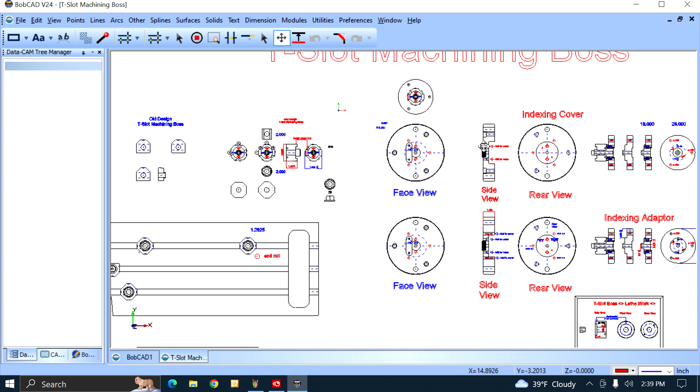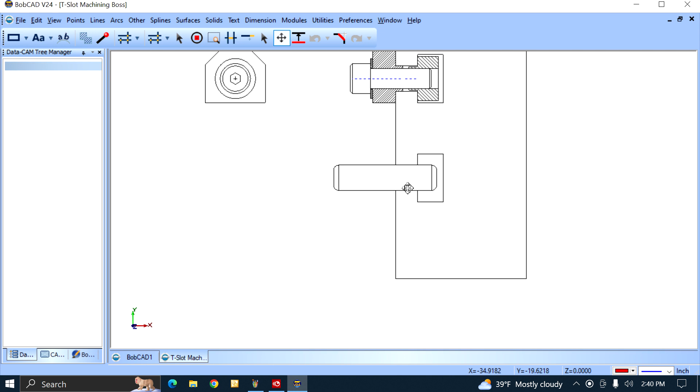All right, now you're in my CAD system. I call it my scribble sheet. I got a million ideas here. You understand? They're all over the place. No rhyme or reason. All right, let me give you an idea what T-slot machining boss is. Let's start here.

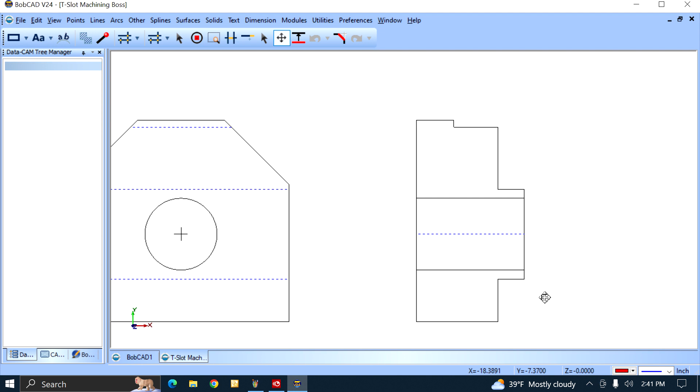Anyways, years ago, I did this, and I'm sure guys are still doing it today. When you wanted to put something parallel to the axis of the movement on a miller, you would put a dowel pin in the T-slot. You see the T-slot here, right? And it just hits tangent on the dowel pin, just about engages. Sometimes they fall over. The dowel pin idea is a piece of shit as far as I'm concerned, right?

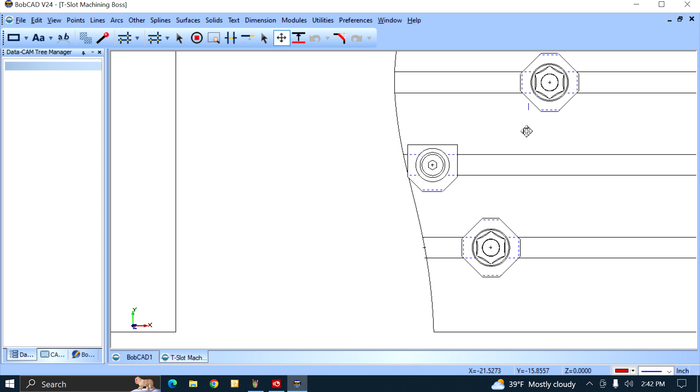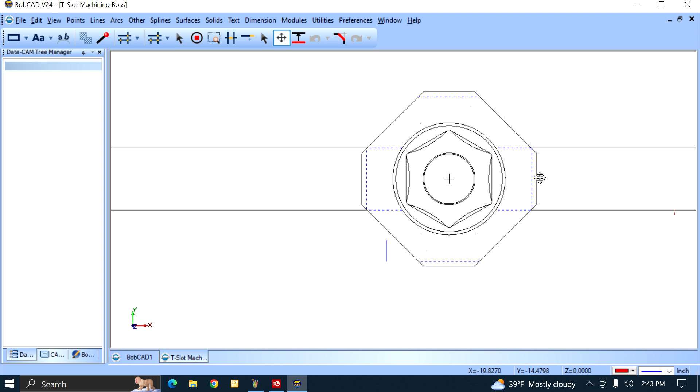What I did is, let me go over here and show you something. You see this thing? You see them invisible lines? You see that right there where the mouse is? That line and this line, that projects there. This line here is the milling machine table surface. This goes up against the surface. This little section goes into the T-slot, right? So that it's nice and rigid and it fits nicely, right?

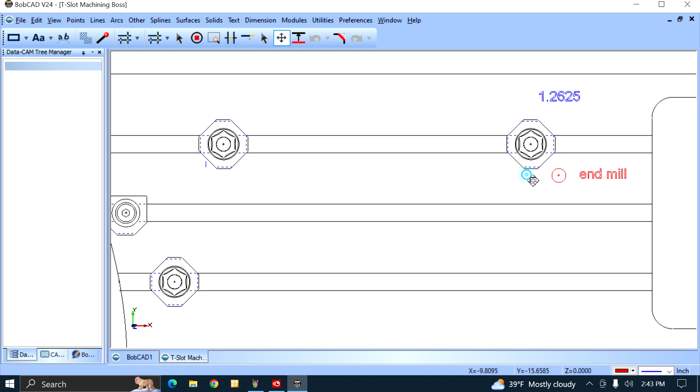This little line here is an undercut because you're going to use this surface. See this surface? You're going to bump something up against here, and you want some clearance underneath it. So here's the table, here's the clearance. You got any chips, they'll end up in that little area there. All right? Let me move on quickly.

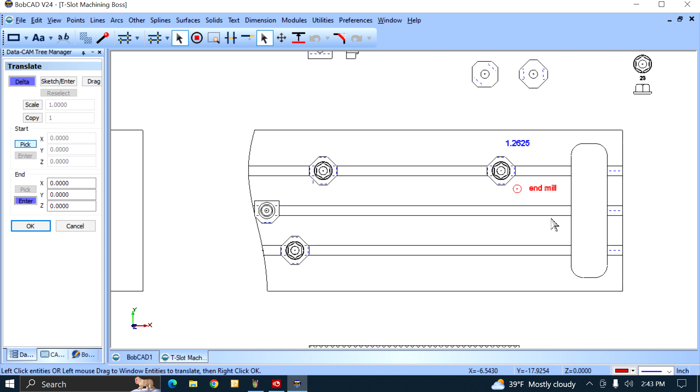Let me show you this. This here's a milling machine table. Looks like one, doesn't it? I'm showing the evolution here. This one, and this one is what I'm going to be making. This is old school. I've had this in my shop for 100 years. You see a washer here, socket head cap screw, and a hex for that cap screw. The invisible lines signify that this is put on a T-slot and it's fitted. So you just screw it down, right?

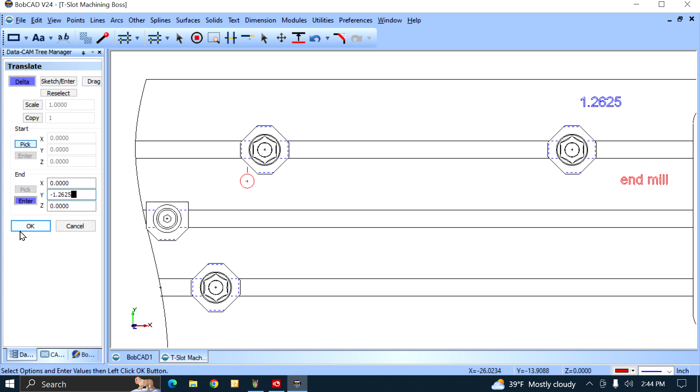Now, what good is that? Well, now that that's down, you can mill along this edge. You see along that edge? Now, if you had a couple of them, you get it dead straight. Let me emphasize it over here. This one here has 4 sides. 1, 2, 3, 4. So I got 4 places I can use for edges.

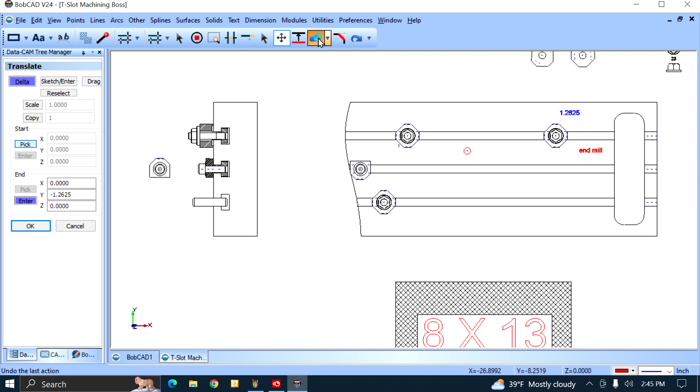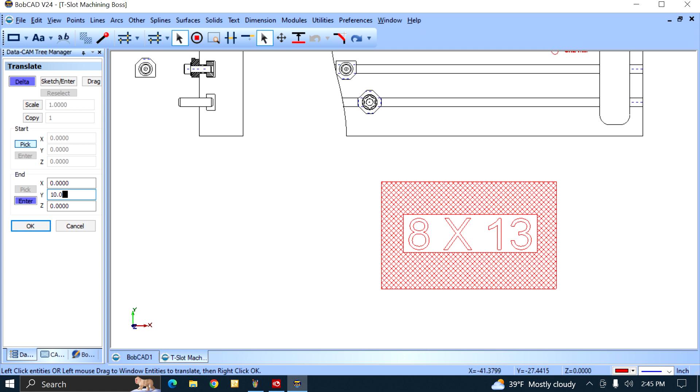Let's say I want to put something on the table, a sheet like this, 8 by 13. And I want to take it out and put it back multiple times. How do I do that? Where's my stop? You see this thing? That's a 1/2 inch end mill. I'm gonna mill along here, hit that boss. Just take a couple of thousandths. Come down here and take a couple of thousandths. Then that will be dead square, as square as the machine is.

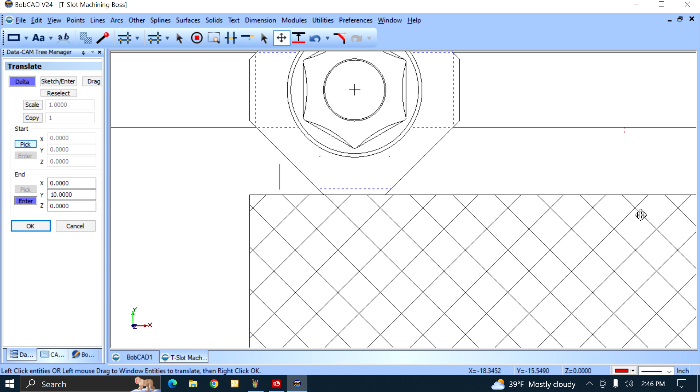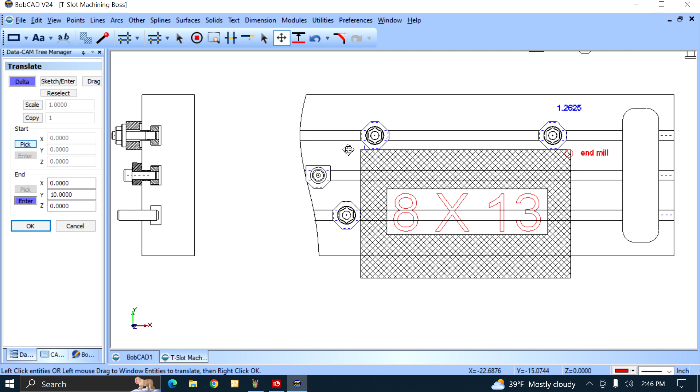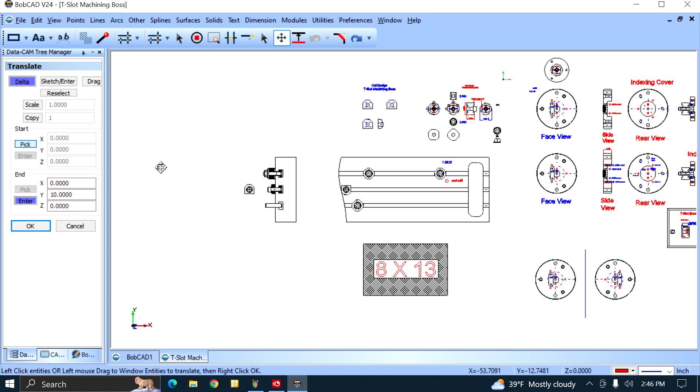Now I'm gonna move that in. Hang on. Now I'm going to move this end down this way to the left. See it? All in the same plane. Now I'm going to move this sucker down this way. Let me get it up so you can see it. You see, right along that edge? So you've cut it dead square, or as square as the machine is, which should be decent. Let me put this sucker back.

Now I'm showing that dotted line, that's clearance underneath, on all of these. I'm going to put this sheet, which is dead square here, up in there against that, okay? Okay, let her rip.

See how the edge of the sheet just hits in a narrow area, and there's clearance under it for any grit or chips. You can see it there, and you can see it here. See it right here? So that's the hot setup. You can take it out, put it back, take it out, put it back.